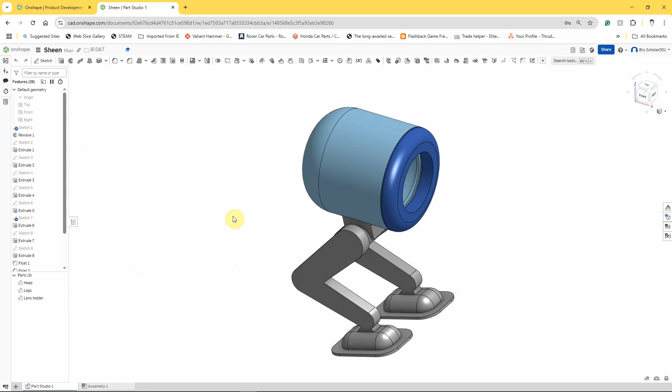We've got Onshape loaded up. Let's open up our Sheen document, and there's the model from the last tutorial.

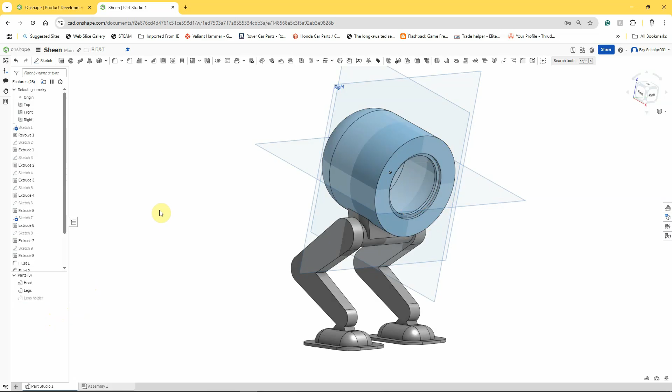Let's turn the origin back on so that we can see it along with the top, front and right work planes. Now it's not just work planes and the origin that we can hide, parts as well - and we're not going to use the lens holder for this tutorial, so let's hide that to make things a little bit easier.

Now at the moment, the way these parts are modelled, they wouldn't hold together. There's a couple of problems. Number one, there's no location for them, and number two, the legs would actually interfere with the head. Let me show you what I mean.

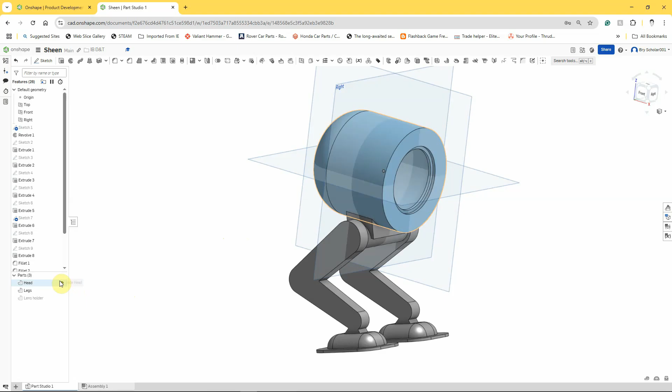If I hide the head, you can see we've got this little lump here on the legs, but if I hide the legs and bring back the head, there isn't a matching lump there. So we need to make sure that it can locate, and we're going to put a pin in there as well, which will make location a bit easier.

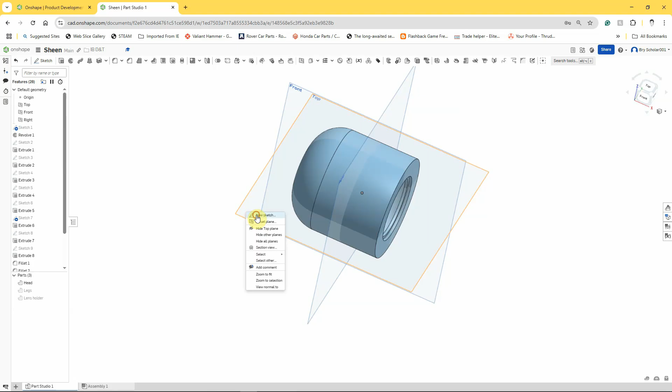So let's just stick with the head at the moment. We're going to create a new sketch on the top work plane. Hover over the top work plane till it highlights the edges orange, right click, left click new sketch, press N to view onto the work plane. All we're simply going to do is create a center point circle on the origin.

Left click to place the center, left click to place the circumference, and then we'll dimension this. Using the dimension tool, left click to place, type in 10, because we want this to be 10 millimeters.

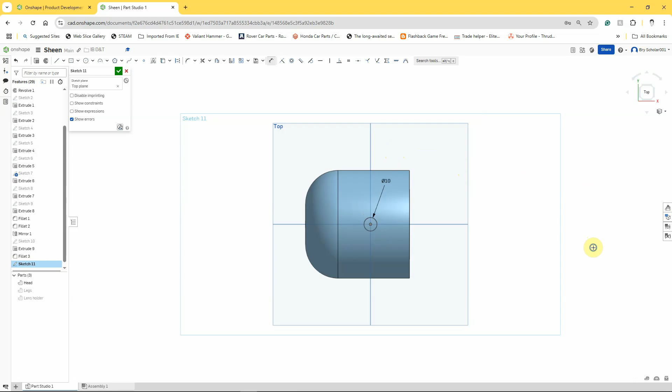We're just going to use this to create a hole in the bottom of the head. So I'm going to extrude, I'm going to remove, and you can see it doesn't quite hit it. So I'm going to change this blind condition until it says through all, and the merge scope is just the head.

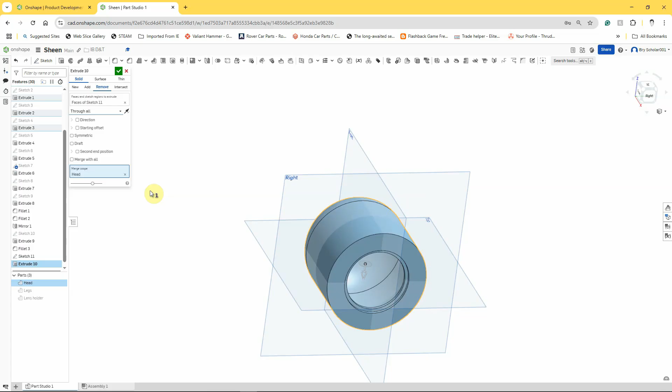Now we could merge this with the legs as well, but we don't want to do that, so it's just going to be through the head. And you can see the preview, there's the hole there. Left click to say that we're happy with that.

Let's show the legs again, and you can now see how that lump is sticking through part of our model. So we want to remove that lump.

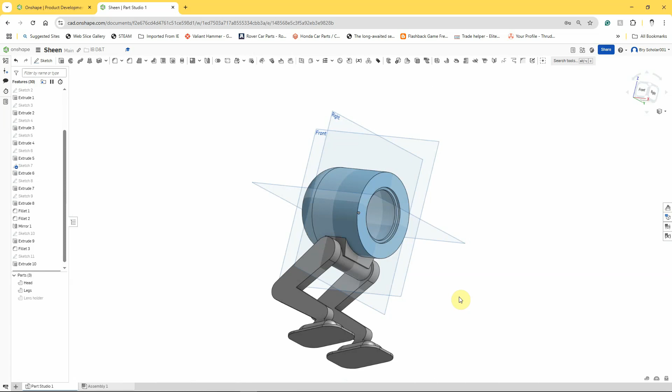So we're going to do a Boolean operation. This is the Boolean tool here, and we can use this to intersect, subtract, or union or join together different parts into one. We want to make sure the Keep Tools box is ticked on this, and we're going to do a subtraction. The tool is going to be the legs.

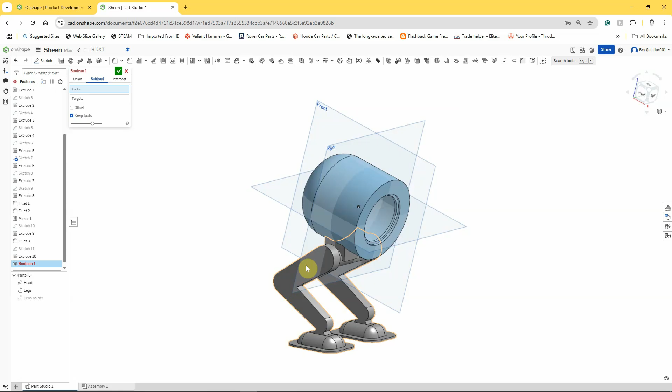We're going to use the legs to remove a bit of the head, so the target is the head, and we want to keep the tool. Let's turn keep the tool off and left click.

You can see that the legs have disappeared, but we've got that little slot cut into the head for it to locate to. We want to keep the legs, we don't want to lose the legs.

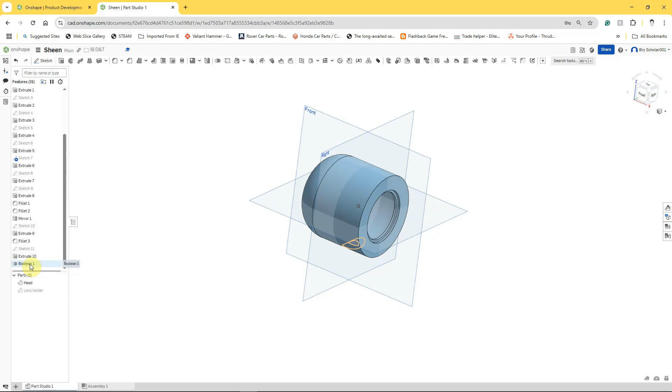So let's right click on Boolean number 1, edit that, and left click on keep tools. Now you can see that we've still got the legs there, but if we hide the legs, we've got the cutout in the head.

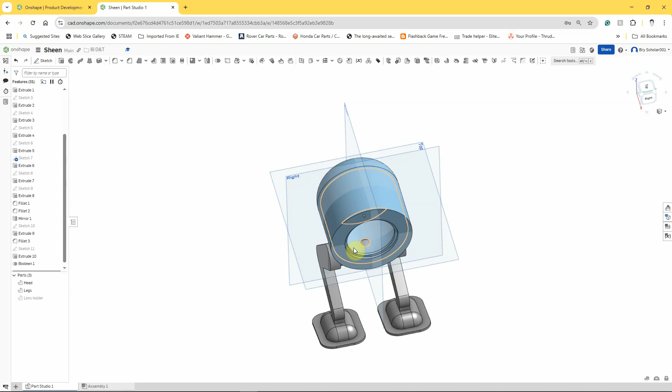So let's turn that back on. That's the first thing. We've got our location hole, we've got the location cutout in the head. Let's now put in a pin that we can add to the legs. This really is just to demonstrate how we can edit parts afterwards, and how we can use the Part Studio to help us with parts that are going to assemble together.

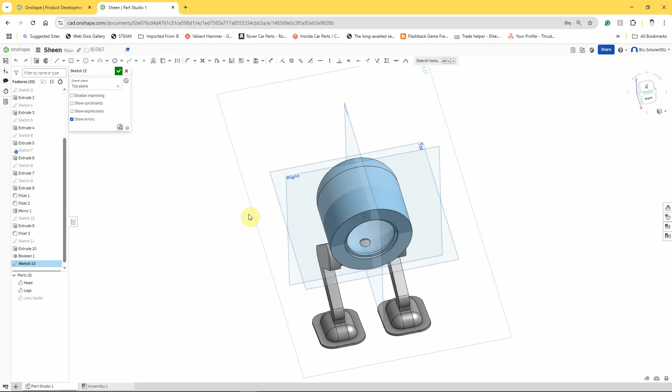So again, I'm going to right click on the top work plane, new sketch, press N to view normal to. Doesn't matter the orientation as long as we're looking down. I'm going to draw a circle again, and in fact let's not do it that way, let's do it a slightly different way. If we come over to here and look at the views, this is a view menu.

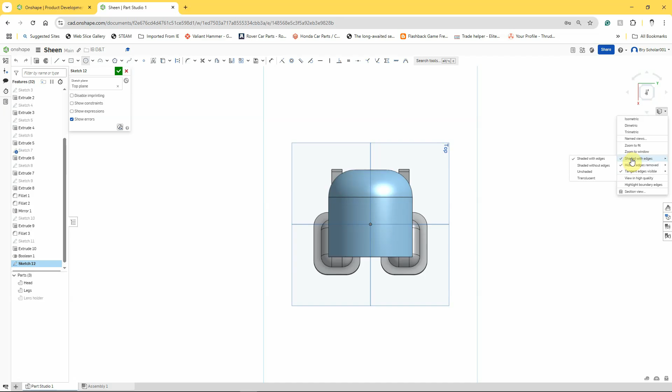We can use it to look at different views of different parts and viewing them in different ways. If we go to translucent, we can see through the whole of the model, and instead of using the circle tool, I'm going to use the offset tool. So I'm going to zoom in. This is the hole that we've got in the head. I'm going to left click on there.

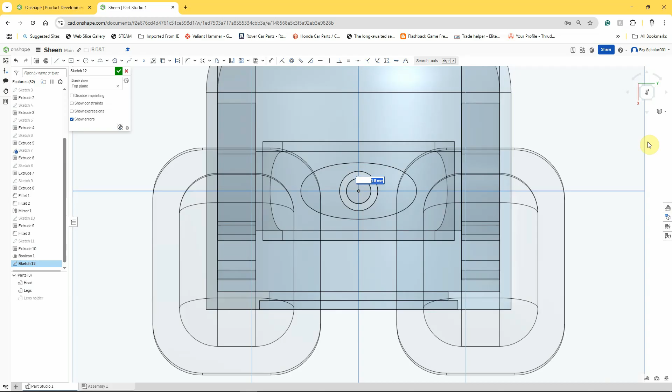I'm going to drag that arrow so it's on the inside. So I've exaggerated it. Left click out of the way, and I'm going to change that to 0.1, so 0.1 of a millimetre. So it's just inside. If we zoom in, you can see there's the gap.

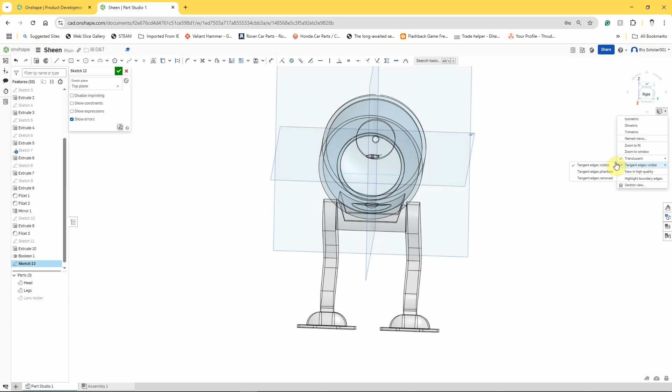And that then is drawn up there, but we can play around with the settings when we extrude just to make that a small pin. So I'm just going to go back and change the view so that we're not translucent. We're in our sort of default shaded with edges, so you can see what's going on.

So I'm going to extrude that. You can see it going in the wrong direction, so let's change the direction, and I'm going to put some sizes in there that might not seem to make sense straight away, but hopefully they will as we play around with it. So keep an eye on what goes on over here. I'm going to change the depth to 35.

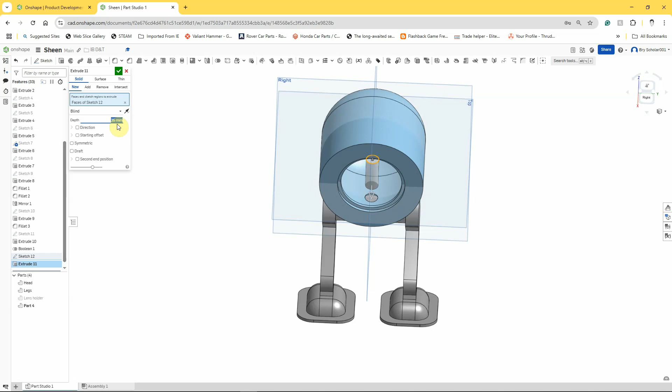So that now merges with our legs. It moves into our legs, or it gets close to it. I'm going to change that to up to part. So go from blind up to part, and now we know that that is going to go to the legs, but I need to say what part.

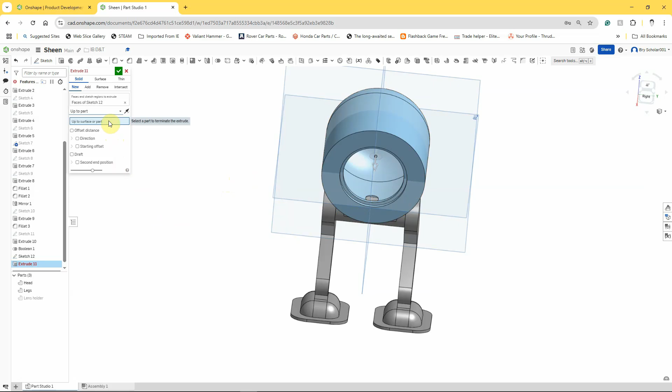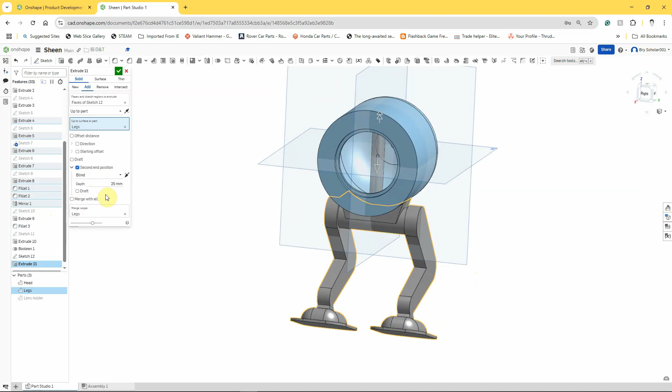So left click on there, go to the part. Now I know, without having to guess distances, what that does. So that's joining onto that part, but that's going to be stuck up in the middle of our head. We're not going to get a bulb in there, so we're going to click on second end position, and I'm going to change the direction so it goes in the same direction. Can you see it trims it off?

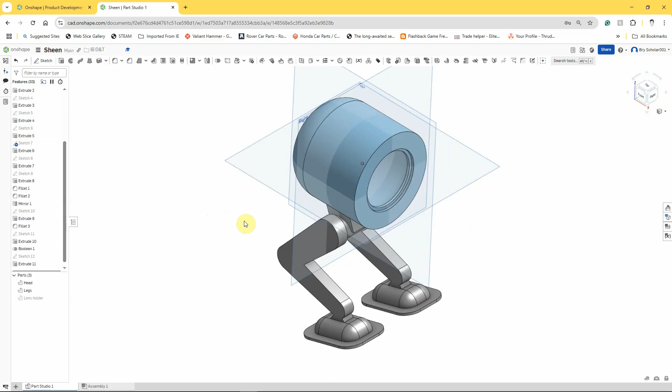That's with the default 25. What we actually wanted was 35 on there. That's the distance for the 35, and we've now got a little lug thereabouts. Click on the tick, and there we go. We've got that so that that assembles together quite nicely. Right click in space, left click on isometric, we can see our model.

And that's it for this tutorial. It was just about creating that join so that we could assemble those two parts. Thanks for watching. See you in the next video.